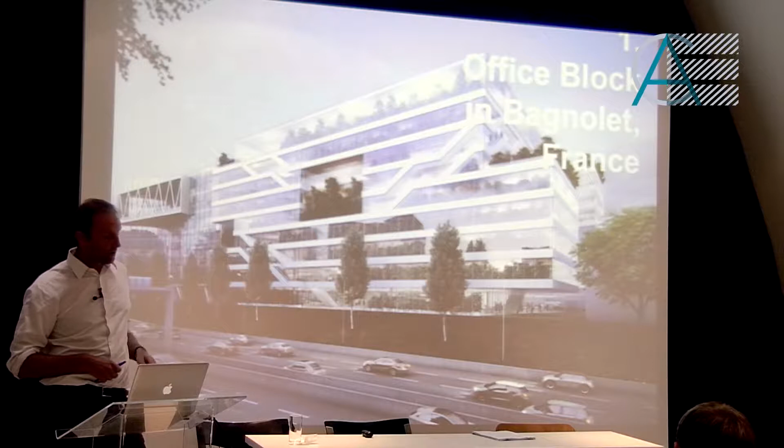So what we do in our studio through examples is trying to promote - for example, this is a building we are currently designing, a 30,000 square meter office building in Bagnolet. We know that tertiary buildings are the most important greenhouse gas producers in France, before housing.

If you look at this Paris site, trying to promote a kind of green belt - actually it's quite difficult to feel it. So when you're in reality and look at this condition, which is our site along the peripheric, we have a lot of constraints that are not in the regulations: pollution, noise, discomfort, and the visual impact of where the building is going to sit.

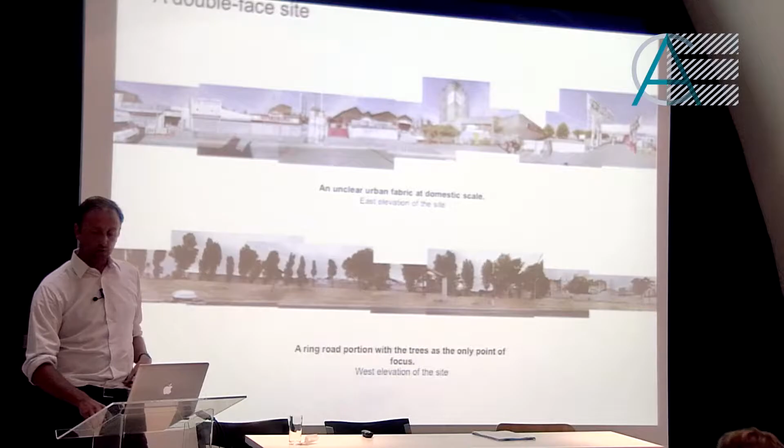So what the architect is trying to do is play with those natural aspects that are somehow in his hands, to understand what is the best solution to make people live in a good environment. So what we came up with, in a more holistic approach, is to find a morphology of a building that addresses different ways according to context and orientation.

If you look at this building, the facade along the peripheric uses a double facade system - not just for high-tech, but to address the idea of: do you really want your office right next to the peripheric? So why not put a step back and create a new space that is good for acoustics, but also creates more remote space that can be a place for people to meet.

Also, the best place when you're along the peripherics to enjoy the city is actually the upper floors, to have a really strong view on Paris, which is something that actually orients your design process.

Also trying to understand the constraints of security - for example, the fire access to the building in this case is allocated along a future pedestrian bridge. So we use a constraint that is technical, but also make something that is a continuity to the city, somehow to cross the peripheric.

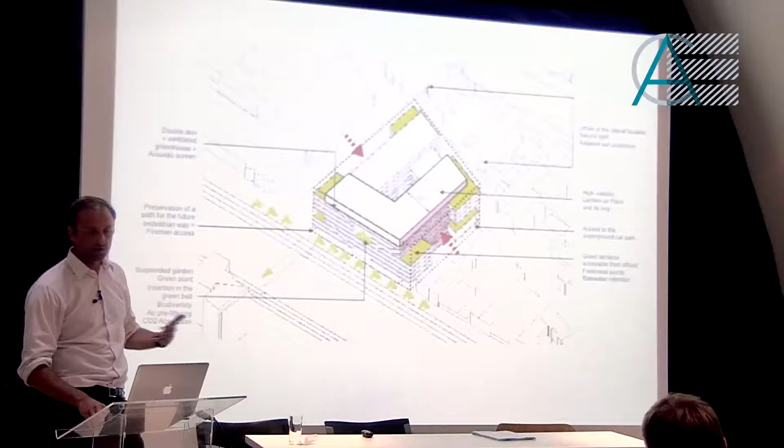And also, we feel there is never enough nature in the city. So in the manipulation of our building, why can't we bring new terraces, new places for relaxation, and create some nice environments, which in the end will also naturally promote some energy effect.

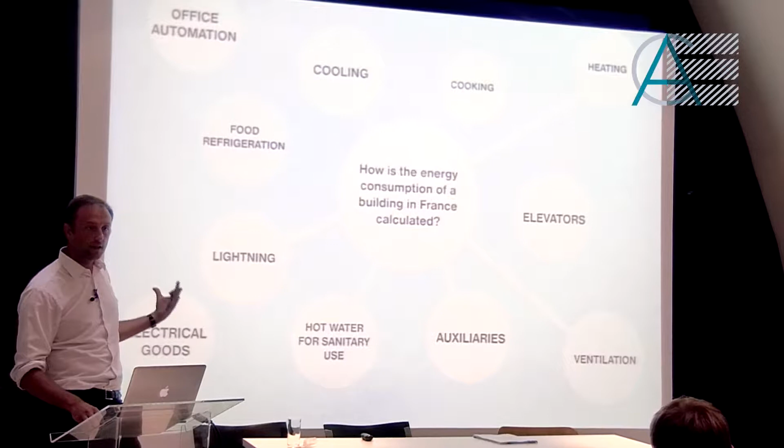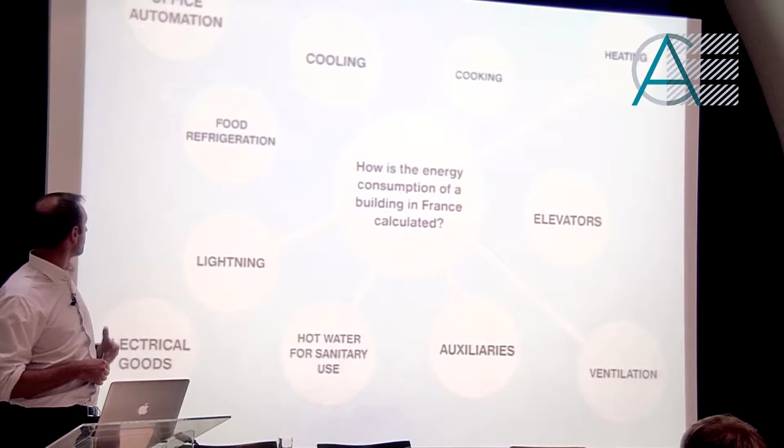Also looking at France and how energy consumption of a building is calculated - it's often looking at technical aspects like lighting, cooling, heating, but not taking much into account things that are electrical goods, food refrigeration, cooking, office automation. Those are not completely implemented in the French regulation.

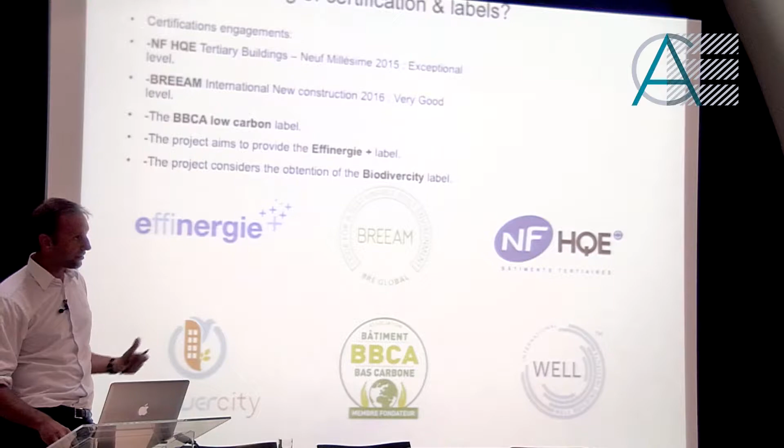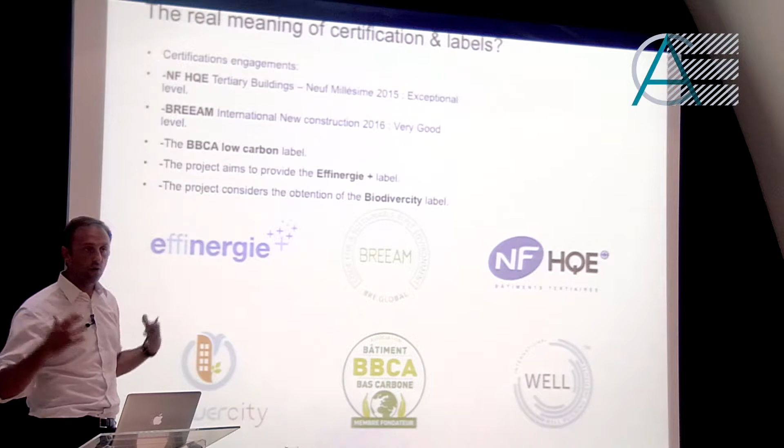So to consider this building, we try to look not only at French rules, but also at labels that are sometimes presetting the regulation of tomorrow. And those labels are still based on the willful character of clients. So we try to look at the whole things we have in hand to address some issues, such as the life cycle of a building, for example.

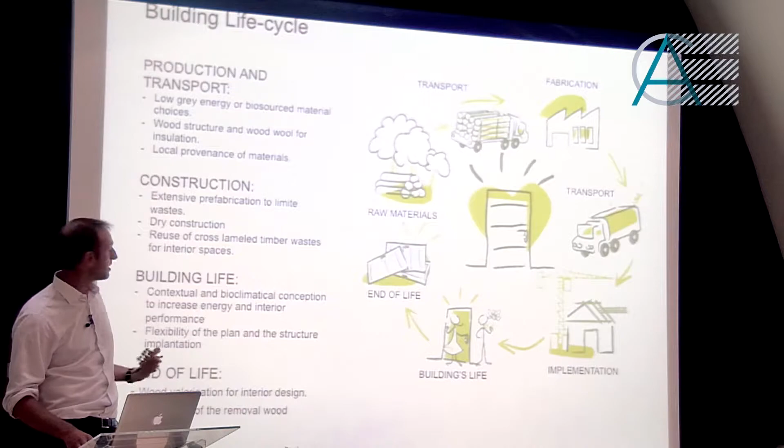In this particular case, for the life cycle of the office building, we try to promote in this project the use of wood as a construction material, which is not so common in France but will come, I think, more and more. It does address things that will help or promote a kind of

long-term lasting building. In terms of holistic approach, we consider the building profit in different ways, also as a long-term sustainable design. For us it's a way to avoid rapid building obsolescence, looking back to the basic idea of enlivening the city and investing the public space through the building. A building can do that according to context and situation, but really a small attempt can help.

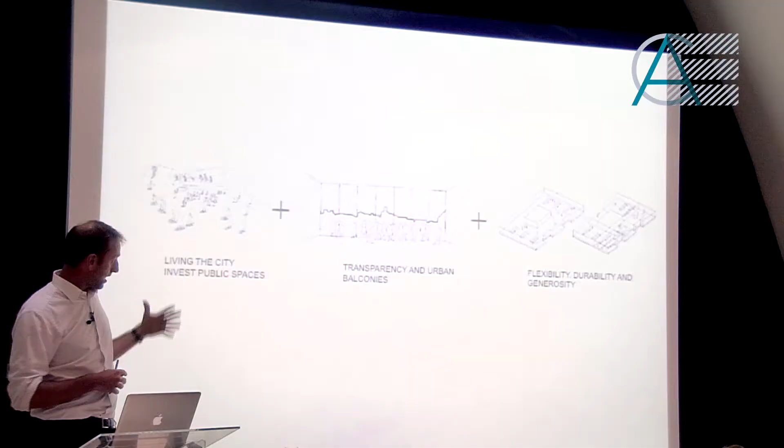Also creating more connection between the city and the buildings through transparency and urban balconies, as I was mentioning. And also looking at the typical layout of each building, whether office or housing - can we address some change, some shift in the typical layout? Which is something we did in this building.

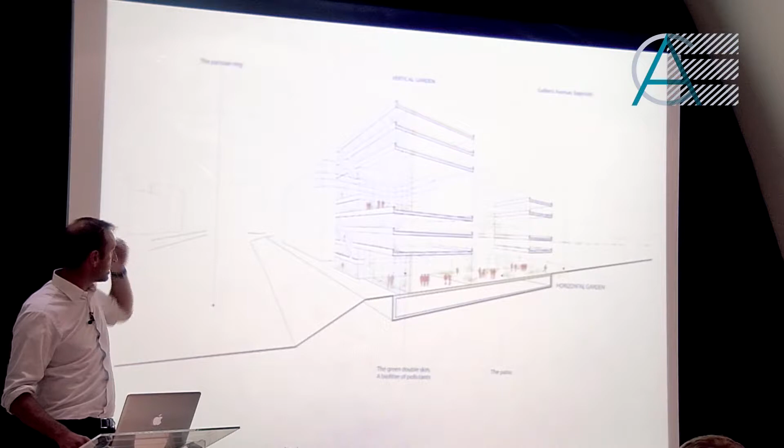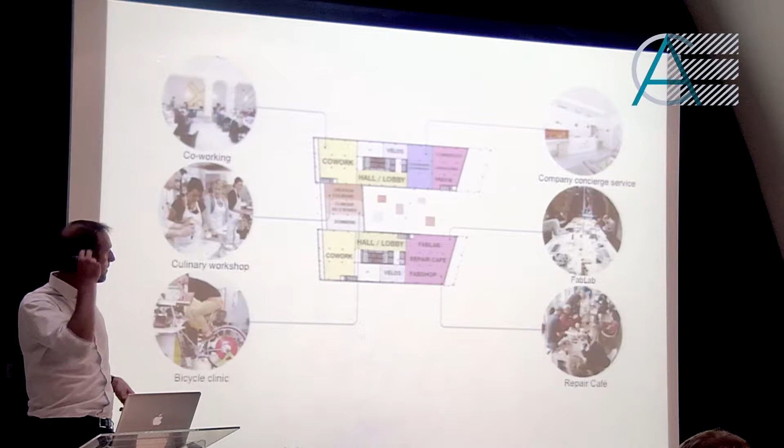I won't spend a lot of time on this first proposal of using a space along the periphery that I mentioned. But also looking at this example, how do we engage a discussion with our client to use the ground floor of an office block not just as another floor, but as a place where you can interact with the city and create new functions which make people who do not work in the building come in.

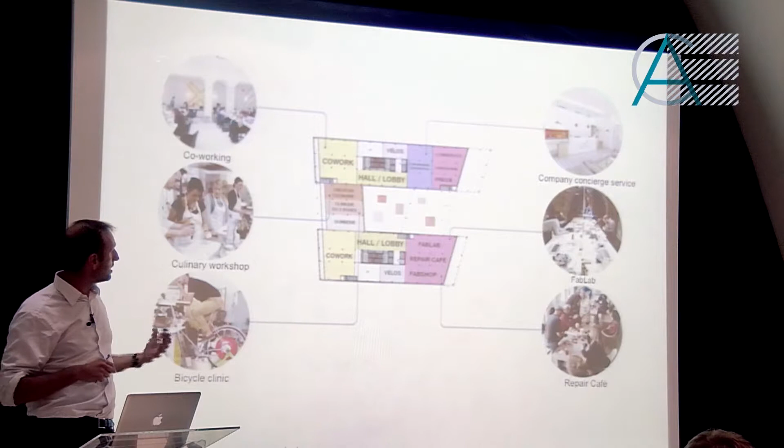So actually in this place we create a U shape connected to the city, but also we promote new services that encourage interaction between users and also people from the city, such as Fab Labs, bicycle clinic, and company concierge service, but also Repair Cafe, which are open.

If you look at this progress perspective, this is the view of the ground floor, and actually the entrance of the building is a courtyard. It's open, it's not a glass door, it's just open to the public.

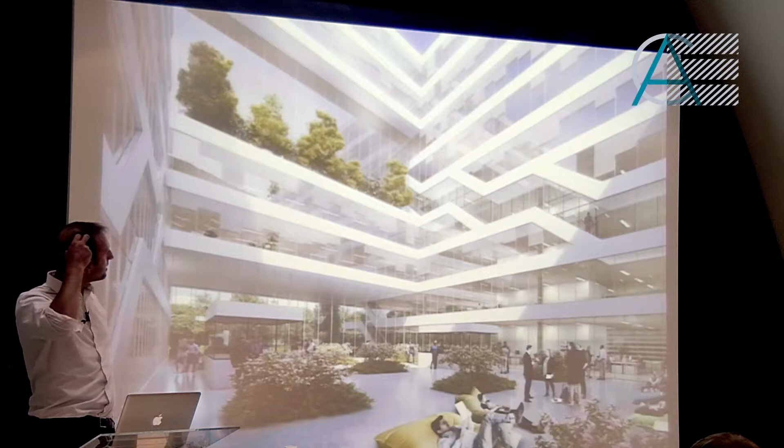Once you enter into the building, this is the type of environment we're trying to promote, interaction between people. As I was mentioning in this design, we shifted the typical cores of the building, vertical cores, security stairs, to the periphery of the building to promote the use of stairs and interaction, creating those spaces, creating some stairs and some really nice views so that people can interact.

But it also has to address internal space, as we mentioned, which is not covered by regulation - how do we create a place where we feel good, and how do we promote spaces that are not just a space to sell, but a space that can promote people to live well in a building.

So very quickly, the second building we are currently designing - I'm showing an example of everyday life buildings, because the office building, but also commercial center in France. We all know commercial buildings. In our approach, we say how can we do a building that is supposed to be really big, to be connected to people, to address some issues of the environment of a larger territory, and to avoid creating what we know as boxes of shopping malls with small units, by creating a place where people feel good.

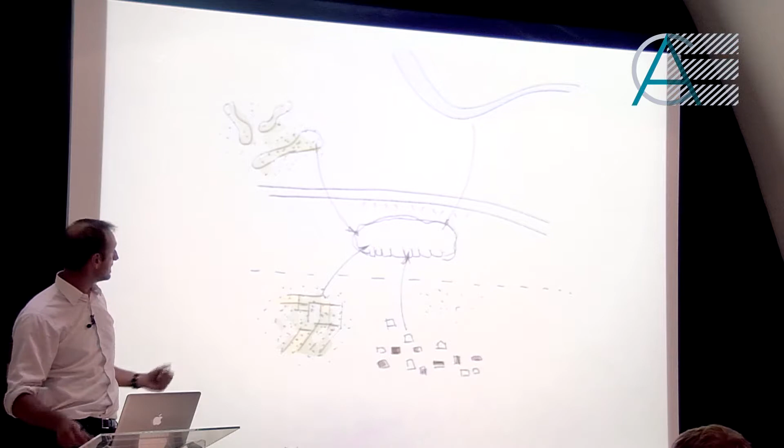So we look at the global environment and try to absorb some of those elements, such as natural landscapes, also some of the inconvenience of the periphery, to address, and also some of the small scale of the village, to incorporate this in one single building.

And we create this simple diagram because I think the role of the architect is to be able to transmit intentions or ideas in a simple manner so that it can be more widely understood. So in this case, we said, well, actually the unity somehow in this environment is that everybody is under the same sky, so we want to create a roof.

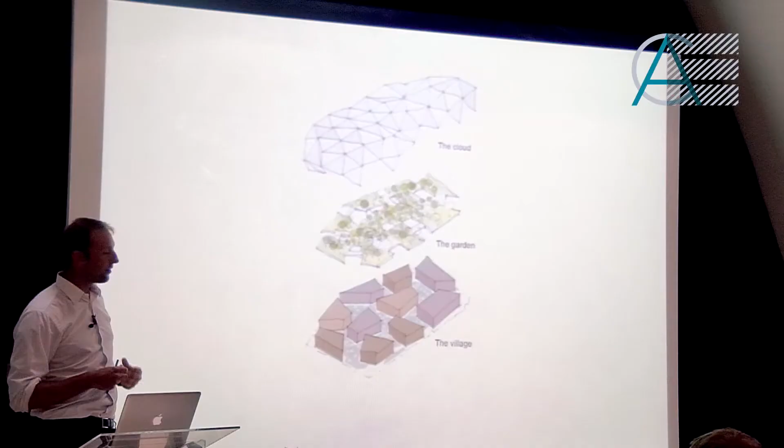We want to have more nature, but we want to be also a little bit protected, and we want to create a feeling of small scale. So we designed this project with

the idea of implementing sensations of feeling closer to nature, feeling closer to human interaction, and to not look at green only as a design aspect, but more as an example for business models of a retail project, because those are large projects, and how can we address those in a more advanced way?

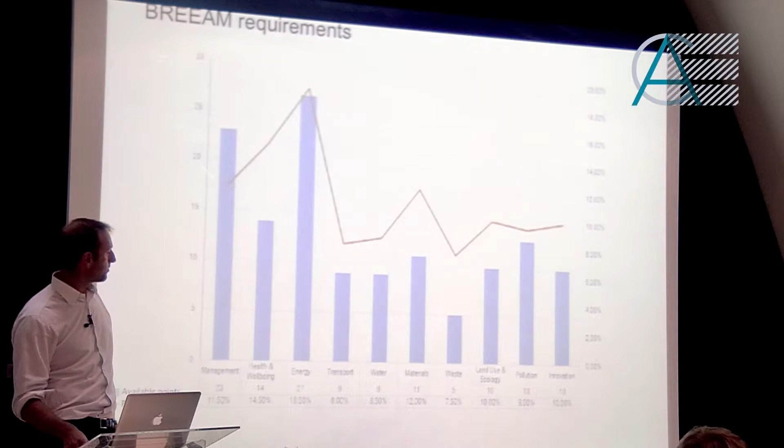So, for example, in this aspect, we go further than the BREEAM requirement, just through intentions that we share with all the team, with the client, with the people we work with. And I think that was mentioned before - how do we see our world today, and we explain that we may be better to do what we do best, but we have to understand what we need to do to make good buildings that are shared by everybody.

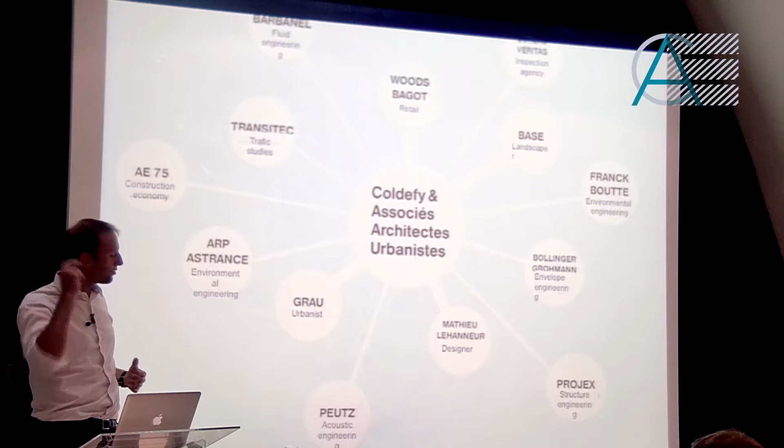So today we are really at the center of the debate, us as architects, but we work with the best experts that are around the table to try to push the boundaries. So this is a kind of typical layout of a team today to be able to promote good ideas, which will be good for the future environment of a building.

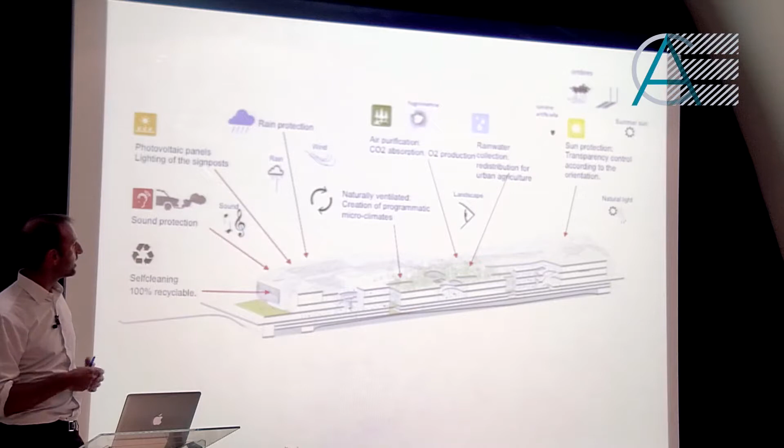So I won't go in detail, but again, why I show you this roof that we call the cloud - it's not just because we want to do a nice cloud building, it's also because we want to promote something - that design can address many issues, and choosing the right materials to address those issues.

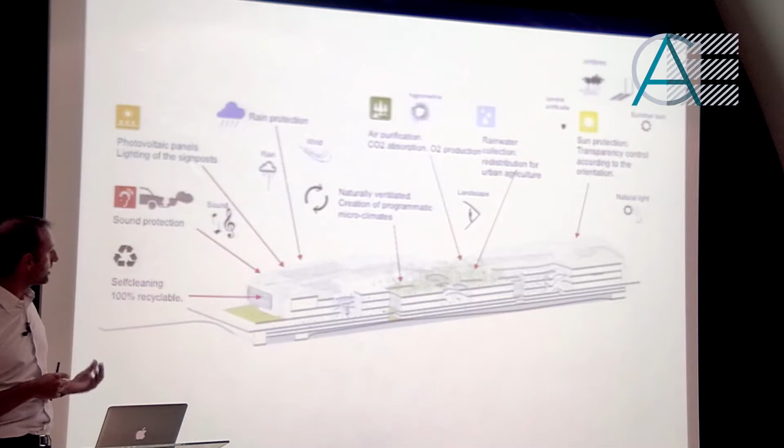We also have the highway, so how our shell will protect from the highway, or address pollution, or address transmission of light, or protect roof gardens that will be accessible from all people on the different floors, and how can we redistribute this energy in the building - the client is not asking for it, but we are just proposing it because it seems natural to us.

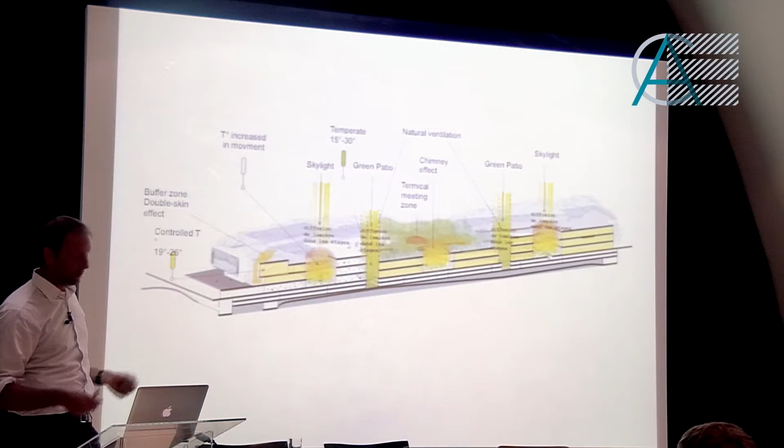So we play with looking at the morphology of the building, really the condition of what can bring a green patio at the center of the building. We play with creating a link, natural ventilation from the top of the building down to the parking garage below. We increase some visual aspects, and this is a visual of the design that is somehow some kind of consequence of a strategy.

I think the major point I like to make from my point of view as an architect is that of course we all have aesthetic ideas, but today we are more driven by trying to combine aspects of what I call human nature, trying to promote the constraints of a client, cost efficiency of a building, but also to merge it with a place where people go back to the basics somehow, with interaction, a sense of connection to light and nature.

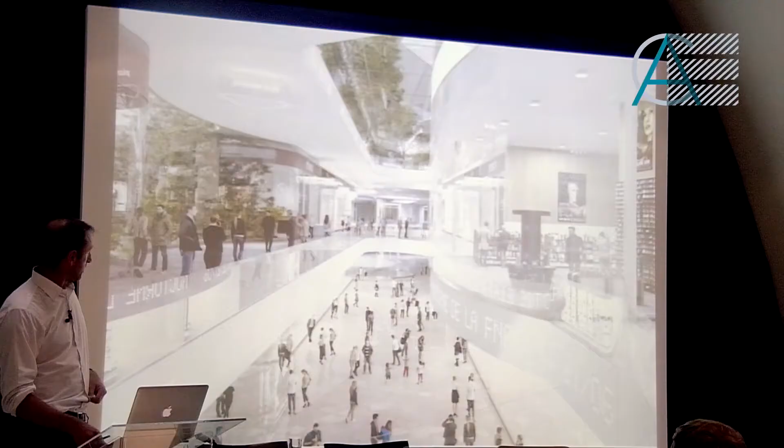So I think, how much time do I have?

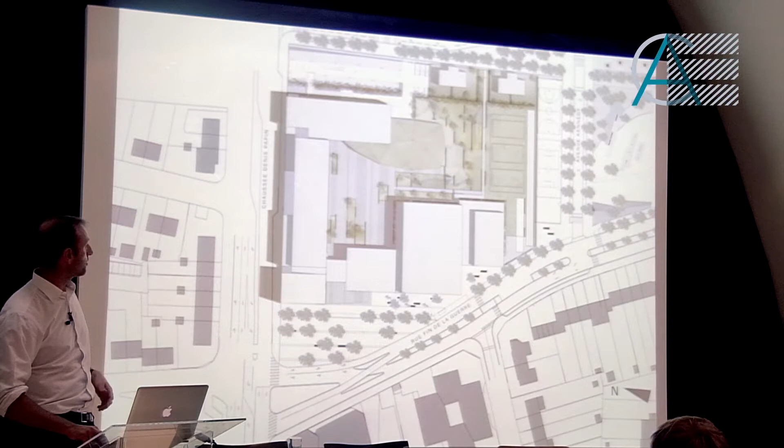We look at massing to obtain the best value of the project and the best quality for the kids. It's really about how we create these massing studies that allow for a good connection, a good intimacy, a good connection to a green environment, and as a consequence, it's not so difficult to address technical issues.

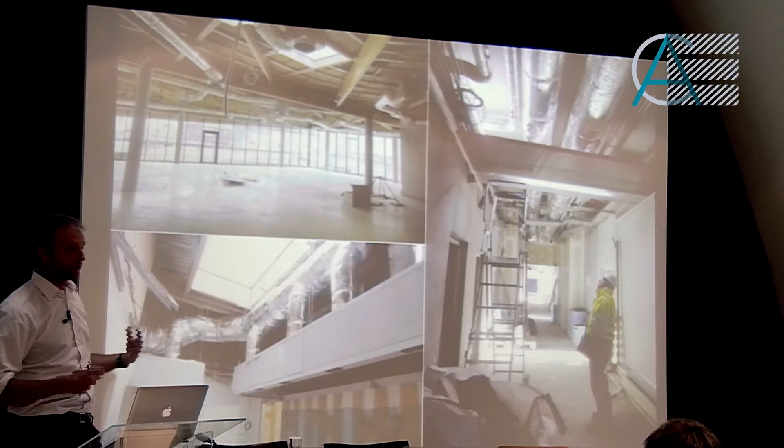So of course it's very technical. In this case, we had to also promote a management system that is centralized for the energy, which also allows end users to be able to adjust somehow the general climate of the building. But it's not only about figures, it's also about quality of space.

This is in a neighborhood which is considered as a bit tough, and the aspects you bring in terms of light or even width of corridor will affect the quality of people, the way they live in the buildings.

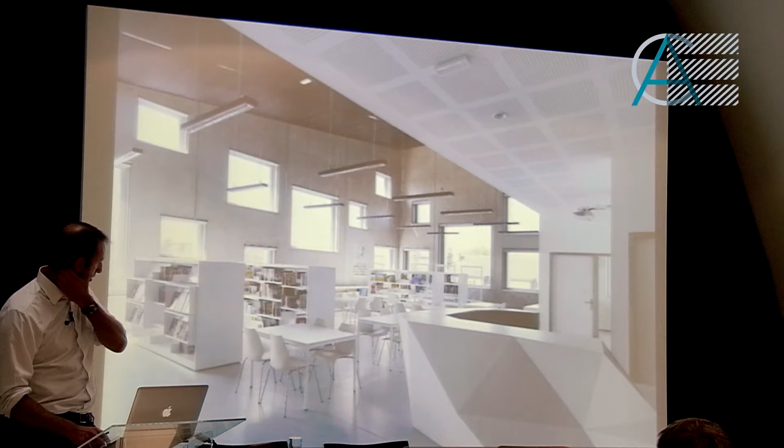This is the resource space for kids, which is a place of reunion, also addressing some of those issues. Even so, these typical education buildings need to be quite thermally well sheltered, we also address issues of being connected to the city and not creating a place where you are introverted.

So for this building, what we propose is also to promote individual control. In each classroom, the teacher has something like a green light or red light to say, is my building at the right temperature? And there is also a notebook for every classroom.

So there is a certain sense of education in the building and also awareness. One of the questions addressed is whether it's good to have super technology controlling all the things, or to also continue to alert individual control and awareness in the conception of the building. And I'll just end with this project.

It's a mixed-use project in north of France, where again we address very simple issues, like the footprint of the building. How can we address a building's footprint in the city and bring nature back into a building, even though it's mixed use and pretty dense?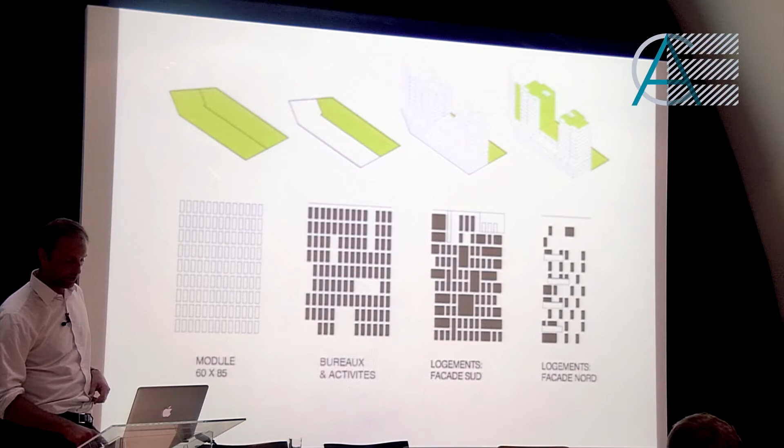Again, we play with architecture not just as a piece of design, but also addressing the right amount of openness in the building according to function and orientation, to create a whole that is somehow seen as a place for a more clever building. Also, something not required by regulation, we promoted in this building.

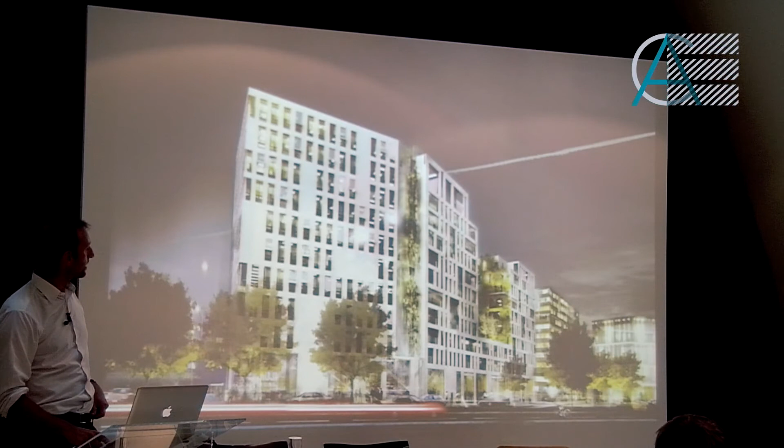As you can see on the left, it's an office tower. On the right, it's a residential block. And in the middle, we created what we call a greenhouse. A greenhouse that isn't just for the eyes, but one that sits on the southwest of the building, collecting warm air and reinjecting it into the system to reduce air consumption.

So this is the building that is built today. Actually, it's a very simple system, it doesn't cost much money, and it brings awareness into the city, because from the street you can understand how it works. I think it promotes a passive solution that is very simple and can be incorporated into the design, not just seen as a technical feature added to a building to target regulations.

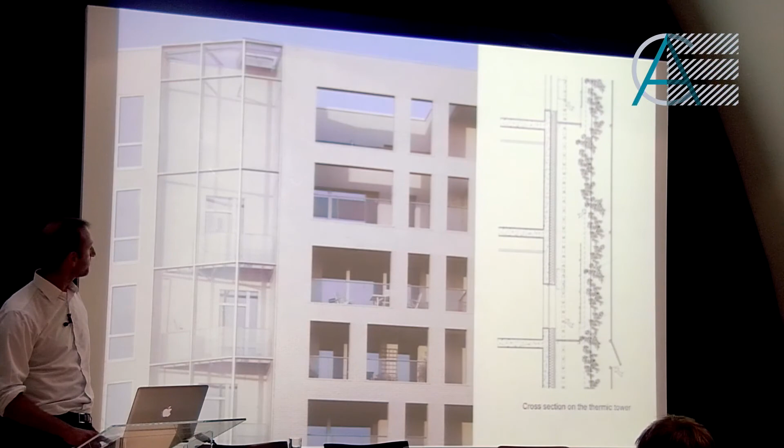So I guess I shouldn't rush, but I just wanted to illustrate a few of these aspects through buildings, and the fact that it's a question of culture—both of architects and of clients—to share the same values and have the ambition to do better buildings, and not just respond to regulation, which is somehow quite easy.